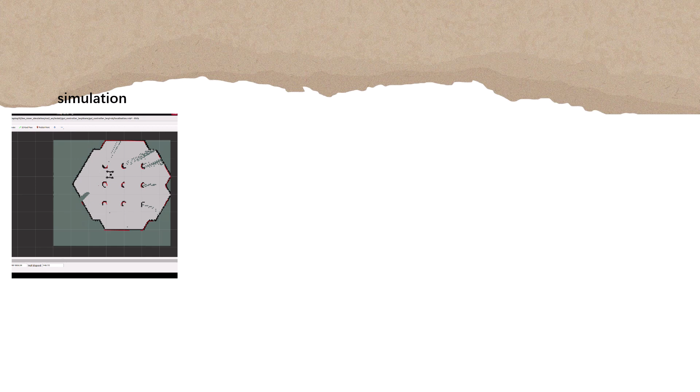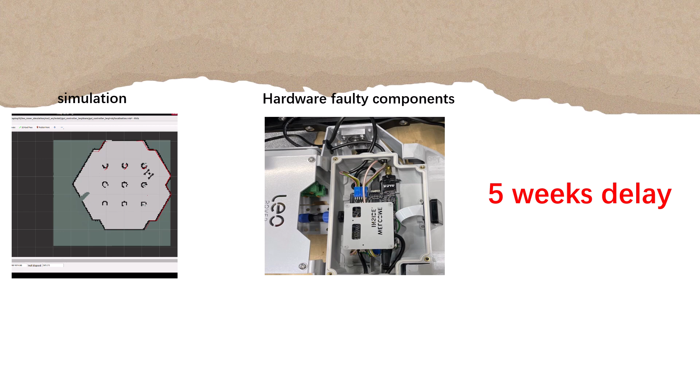progress on the physical robot was delayed due to hardware issues involving the Raspberry Pi and SD card. Although these issues were eventually resolved, the resulting 5-week setback significantly reduced available lab time.

Consequently, a number of the requirements in the following two sections were only partially fulfilled or remained unmet during physical testing.

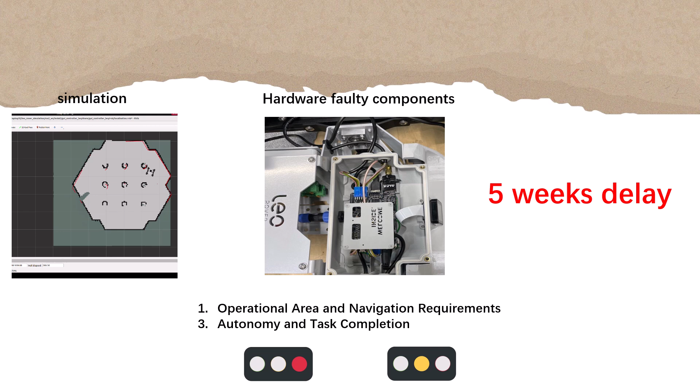Requirement 1 states that the robot must remain within operational boundaries. Since autonomous navigation was not fully functional, the robot could not stay within boundaries unless manually controlled. However, in simulation, it did stay within limits even when targets were placed outside the boundaries, as shown here.

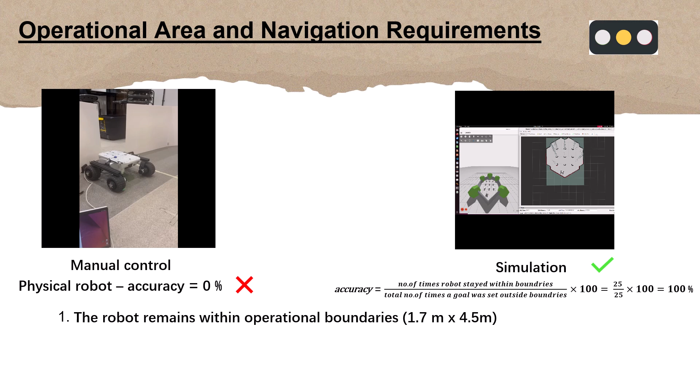Requirement 1 also specifies that the robot must localize its starting position. This was successfully achieved by the physical robot.

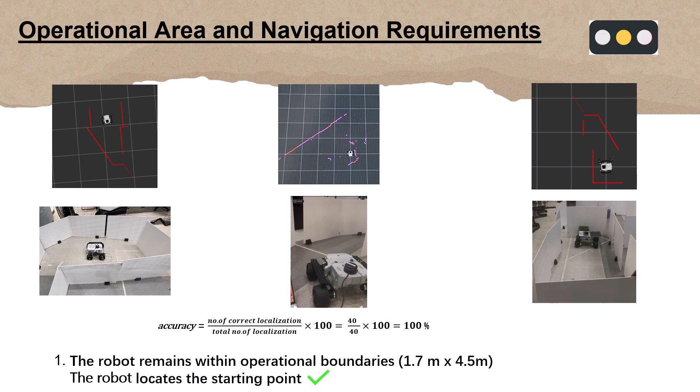A comparison between the robot's actual position and orientation in the environment and its representation in RViz indicates accurate localization, confirming that the robot correctly identified its starting pose.

Requirement 2 states that the robot must detect obstacles within 10 meters. Testing showed that the LiDAR reliably detected white obstacles up to 13 meters, meeting the requirement with a 100% success rate.

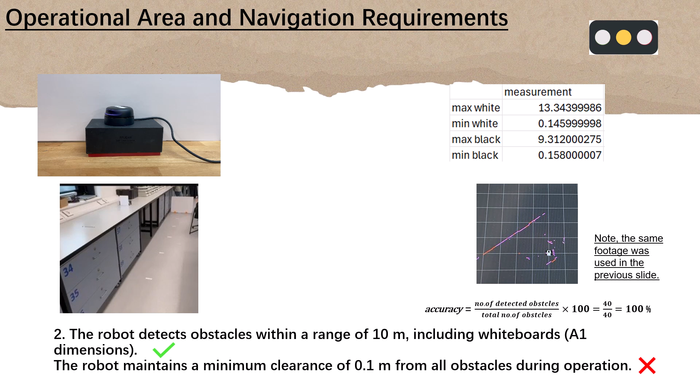However, Requirement 2 also specifies a minimum clearance of 0.1 meters from obstacles, which was not achieved. Due to the lack of autonomous navigation, the robot could not maintain this clearance as a result.

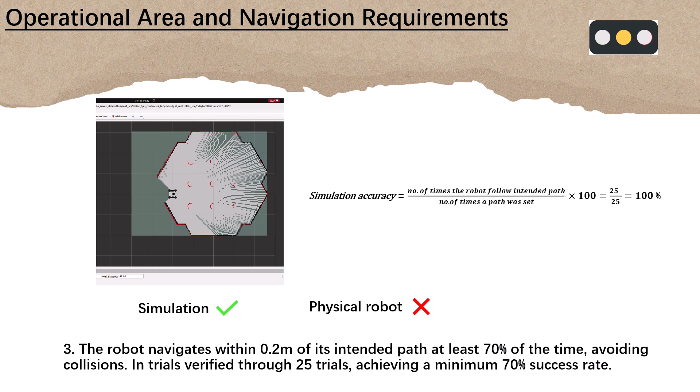Requirement 3 states that the robot navigates within 0.2 meters of its intended path while avoiding collisions. As with previous requirements, this was met in simulation but not on the physical robot due to incomplete autonomous navigation.

In summary, you can see that the operational area navigation requirements were all partially met. Next is autonomy and task completion requirements.

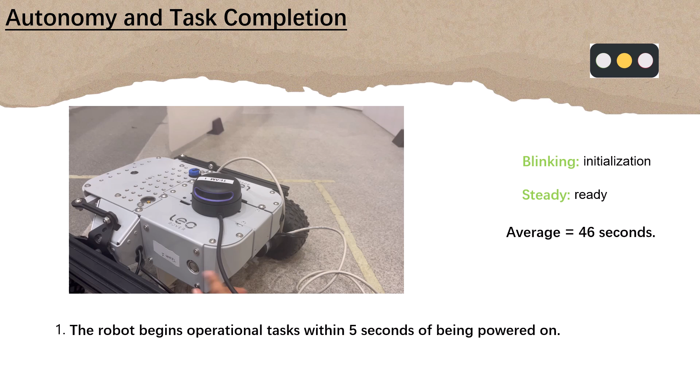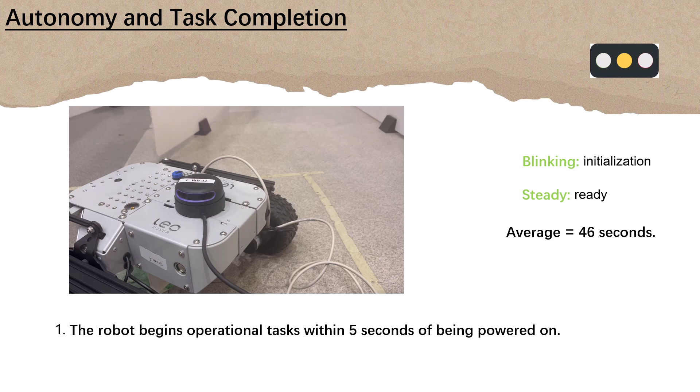Requirement 1 specifies that the robot must initiate operational tasks within 5 seconds of being powered on. As demonstrated in the video, after pressing the power button, the system status LED begins blinking green, indicating initialization, and transitions to solid green once ready.

On average, this process took 46 seconds, meaning the requirement was partially met.

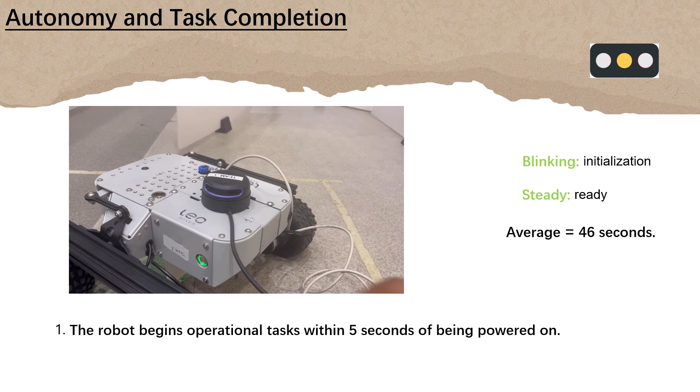Requirement 2 states that the robot explores and maps the operational area. Similar to previous navigation requirements, this was met in simulation but not in the physical robot.

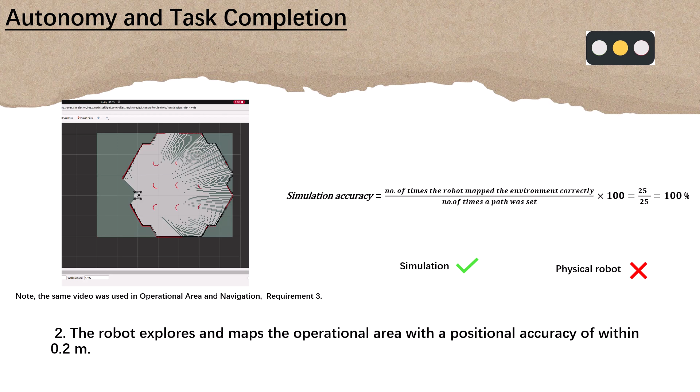Requirement 3 states that the robot must determine its position in the environment. As with Requirement 1 in operational area navigation, comparison between the robot's actual location and orientation and its RViz representation indicates accurate localization.

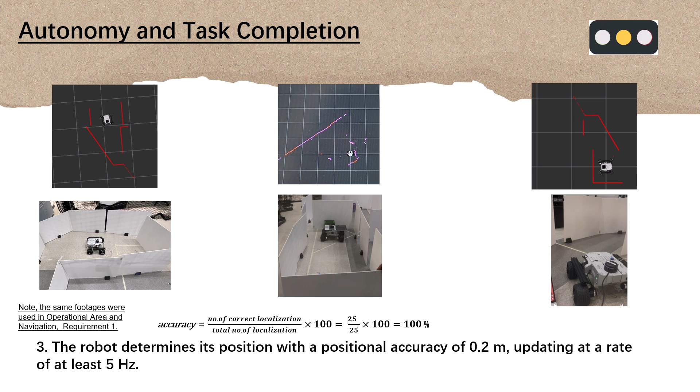However, since the exact position values, x, y, and orientation, could not be extracted from the robot software, this requirement is considered partially met.

The final two requirements relate to the overall system integrity. As the subsystems were not fully functional, the robot was unable to complete the task for even one colored object, nor could it complete all assigned tasks within the 20-minute timeframe.

Next is object detection requirements. Requirements 1 and 2 state that the robot must detect unidentified colored bins in the environment.

The screen recordings shown use the developed object detection algorithm and represent 6 sample cases, tested over 10 runs per color. The algorithm successfully detects blue, red, yellow, and orange bins, but fails to detect purple and green.

For classification, blue, red, and yellow are correctly identified, while orange is misclassified as red. Since only 3 colors are required and 3 are correctly identified, these requirements are considered fully met.

And here are the calculations for both requirements. For Requirement 3, the robot was initially required to measure each bin's dimensions.

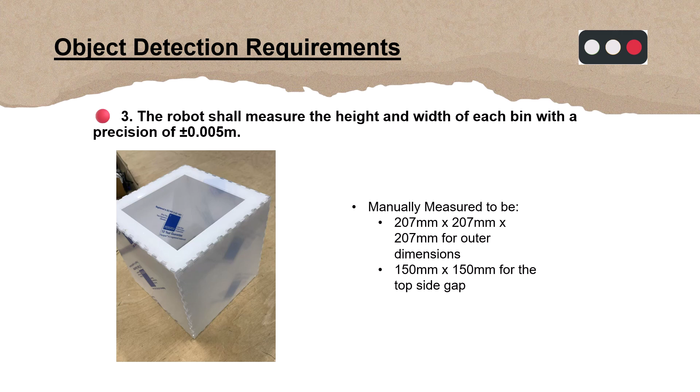However, since all bins now adhere to fixed standardized sizes, this step was removed from the algorithm to reduce computational load. Requirement 4 states that the robot shall identify the color of each object.

To increase task reliability, object colors were limited to blue, red, and yellow. These were correctly identified in 100% of trials, as shown.

Requirement 5 states that the LEO rover must detect obstacles at 1 meter to allow time to stop. In testing, the vision algorithm reliably detected colored blocks at 0.5 meters, limited by the uncalibrated depth camera.

Although this is below the required range, it still provides over 2 seconds to stop at a top speed of 0.25 meters per second. Formal range testing was incomplete due to limited lab time, and the 0.5 meter result is based on earlier unrecorded trials.

The last three requirements are regarding object grasping. In the video demonstration, the manipulator begins in its sleep position before smoothly extending toward a 20-gram sample block, opening its gripper to the full 0.07 meters span. As it approaches, upon contact, the gripper closes to 0.03 meters, securely grasping the block, then lifts and retracts back.

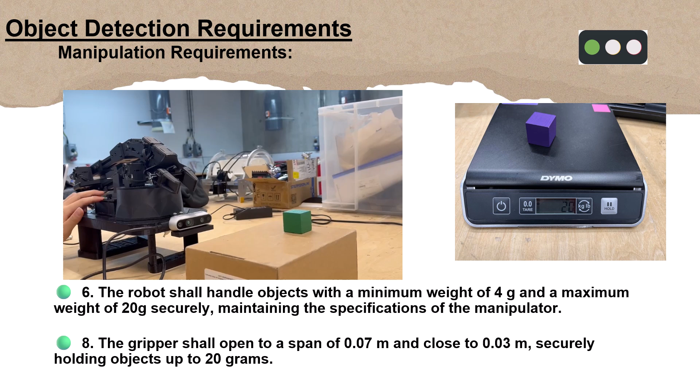Note that, due to a delay in our hardware delivery, the payload sled shown here was kindly provided by a neighboring team. We integrated it with our own manipulator and control code. Therefore, these requirements are fully met.

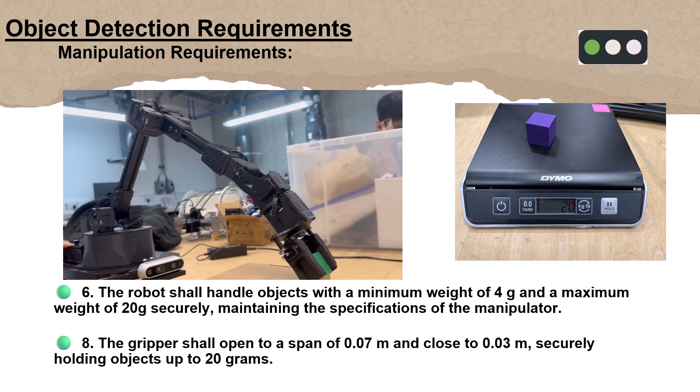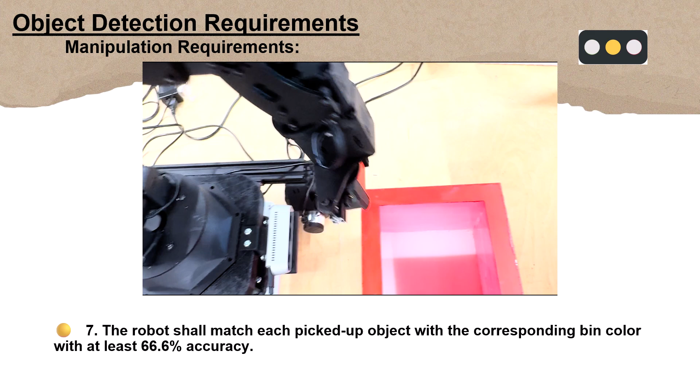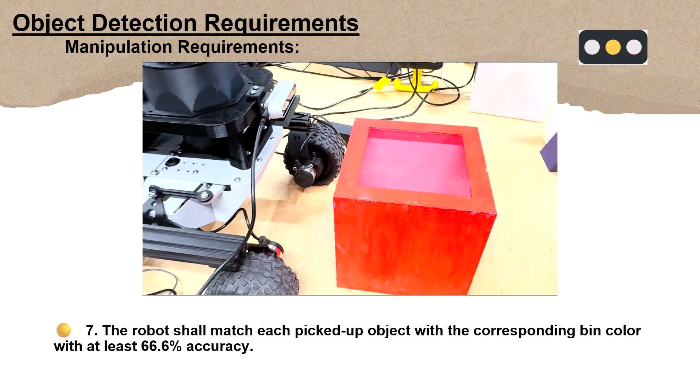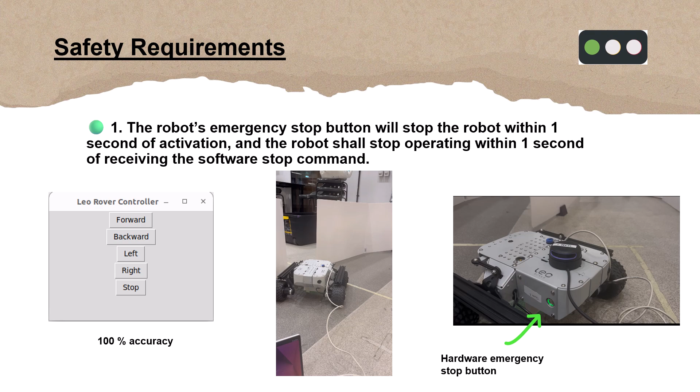Next is safety requirements. Requirement 1 states that the robot emergency stop button will stop the robot within 1 second of activation. We have deployed a program to manually control the robot, which includes a stop button. In this video, the forward button was held for a while, then the stop button was pressed. The robot immediately stopped. Also, the LEO rover has a built-in hardware emergency stop button located near the battery.

Safety requirement 2 states that the robot's maximum speed must not exceed 250 mm per second during initial testing. To meet this, we implemented a speed limiting function in the code. As shown, when a forward velocity command exceeding 250 mm is sent, such as 1 meter as an example here, the robot automatically limits it to 250 mm per second in the x direction.

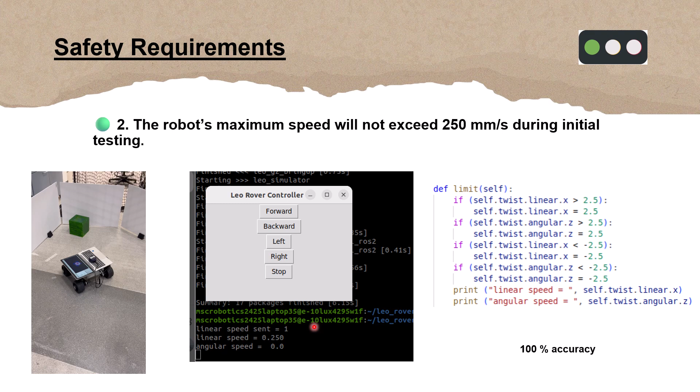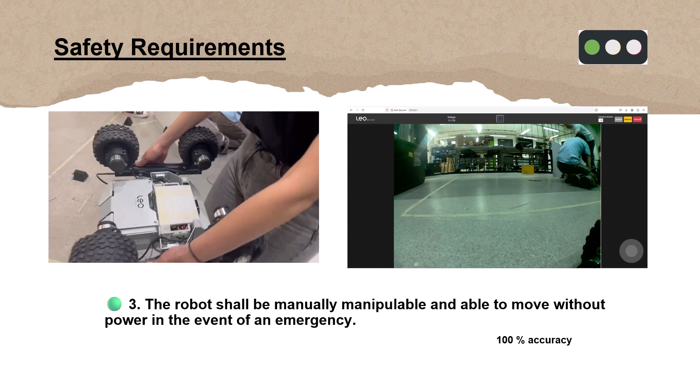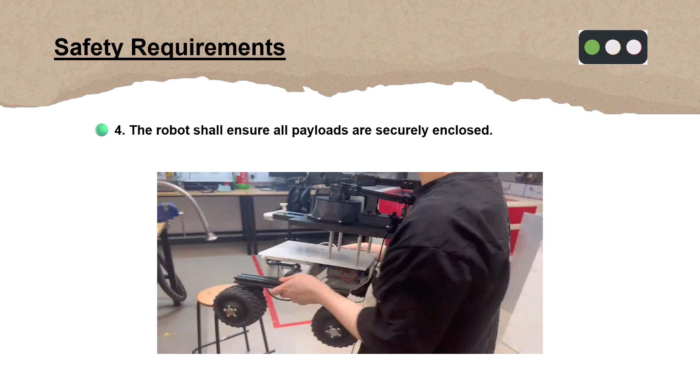Requirement 3 states that the robot shall be manually manipulable. This was successfully achieved. The robot can be easily carried in the event of a power loss, and manual movement was tested both with and without power. Requirement 4 was fully satisfied. We ensured that all components of the robot are securely enclosed and tightly connected, minimizing the risk of unexpected incidents.

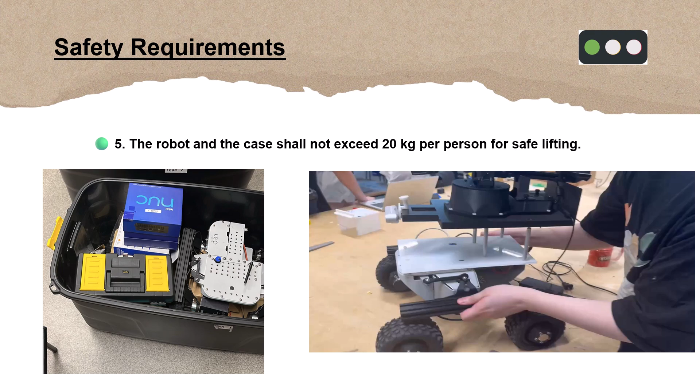Requirement 5 was met successfully. The entire box, with all add-ons, is easily liftable by one person, indicating it is under 20 kilograms. Also, the assembled robot can easily be lifted by a single person, as shown here. While a scale was not available, the LEO rover weighs approximately 6.5 kilograms, and our payload with all add-ons, based on the sum of its components, is estimated to be under 5 kilograms. This brings the total maximum of roughly 11.5 kilograms, confirming the requirement is met within the margin.

This concludes the safety requirement section, all of which were successfully met.

The last section is the hardware requirements. In terms of requirement 1, the entire robot was built based on the LEO Rover 1.8 developer kit and integrated with all specified accessories and add-ons, ensuring complete functionalities.

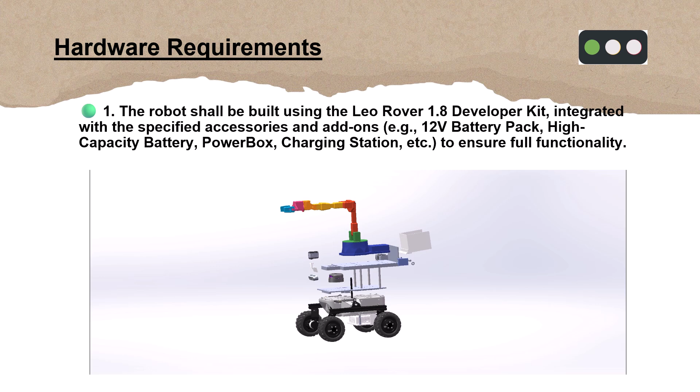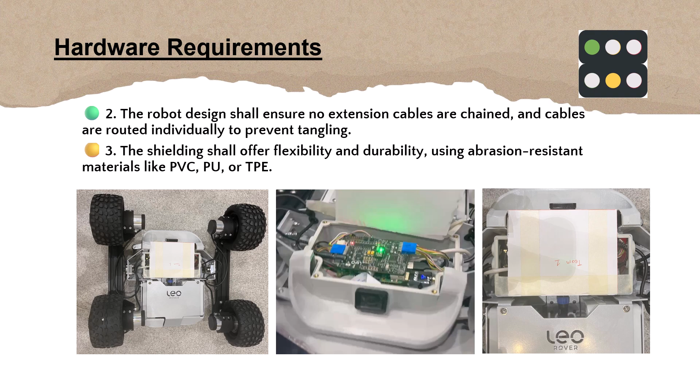Requirement 2 states that the robot design shall ensure no extension cables are chained. As shown in the images, cable routing is tidy and secure, with no tangling or chaining. Only one external cable, an Ethernet wire, was used, and it was routed safely through a designated exit point. We found a creative solution by routing the Ethernet cable through the chassis cutout originally intended for wheel clearance. Since our operational setting is a flat field, this space was not needed for mobility and was repurposed for cable management. Subsequent connections for the camera, manipulator, and LiDAR were made externally.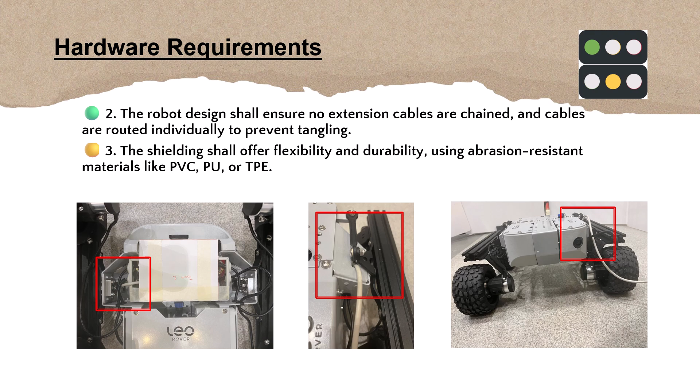Requirement 3 specified that the shielding must provide flexibility, durability, and be made of abrasion-resistant materials. The core of the board is composed of extruded polystyrene foam, a lightweight and rigid material. This core is sandwiched between two layers of white clay-coated paper, which offers a smooth, printable surface. While the rest of the robot is constructed from abrasion-resistant materials, the use of polystyrene foam and the clay-coated paper means the requirement is only partially met.

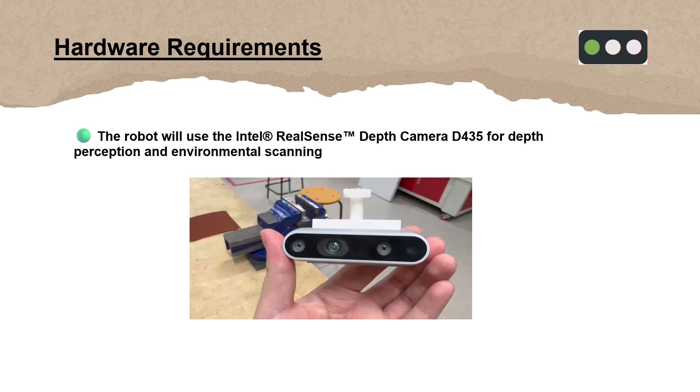Requirement 4 simply states the robot will use the PincherX 150 gripper. Requirement 5 is about using the RPLiDAR A2M12 in the LEO Rover. Finally, requirement 6 is about using the Intel RealSense depth camera. As a summary, we can see that most of the hardware requirements were met successfully. This concludes the requirements of our robotic system design project.